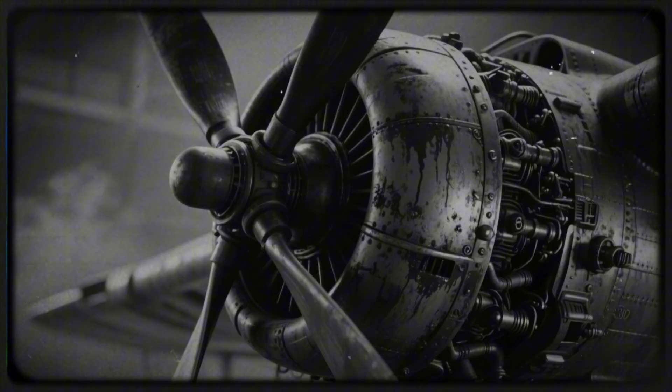The pilot advances throttles for takeoff, the engines roar. The aircraft accelerates down the runway. At 80 knots, flames erupt from the number 3 engine. Not exhaust flames, not backfire. Real flames. Magnesium burning at 5,600 degrees Fahrenheit.

The pilot pulls throttles to idle. Too late. The fire spreads. The engine disintegrates. Burning magnesium falls onto the wing. The wing catches fire. The aircraft never leaves the ground. It burns on the runway. Total loss. Crew evacuates safely. But the most advanced bomber in the world just destroyed itself during takeoff.

This wasn't an isolated incident. This was the pattern. B-29 engines caught fire constantly, during ground tests, during takeoff, during flight, during landing. The engines simply burned. By mid-1944, of 414 B-29s that would be lost during the war, only 147 would be lost to enemy action: flak, fighters, combat. The remaining 267, nearly 65%, would be lost to engine fires and mechanical failures. 65%. The B-29's own engines killed more aircraft than the Japanese did.

Let me tell you about the moment when American commanders realized that mathematics, not enemy action, would determine whether the B-29 program succeeded or failed. And let me tell you how they changed the mathematics.

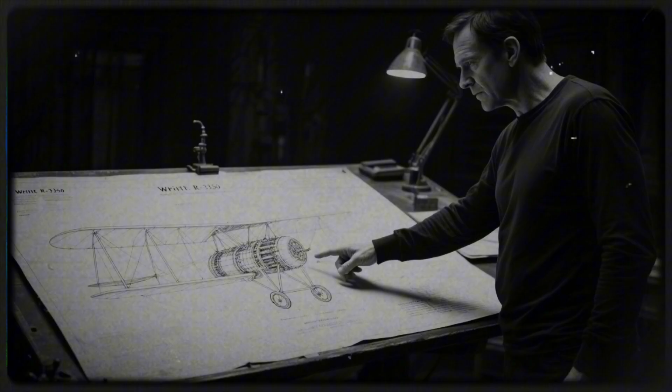But the B-29 has a problem, a mathematical problem. The Wright R-3350 engines catch fire. Let me explain what the Wright R-3350 duplex Cyclone engine is. It's an 18-cylinder radial engine, 2 rows of 9 cylinders each, the most powerful radial engine in production. 2,200 horsepower at takeoff power. Engineering marvel, technological achievement. But the double-row design creates a cooling problem.

The front row of cylinders receives cooling air directly. Air flows over them effectively. These cylinders run at acceptable temperatures. The rear row of cylinders sits behind the front row. Cooling air must flow between the front cylinders to reach the rear cylinders. This airflow is restricted, inadequate. The rear cylinders run hot.

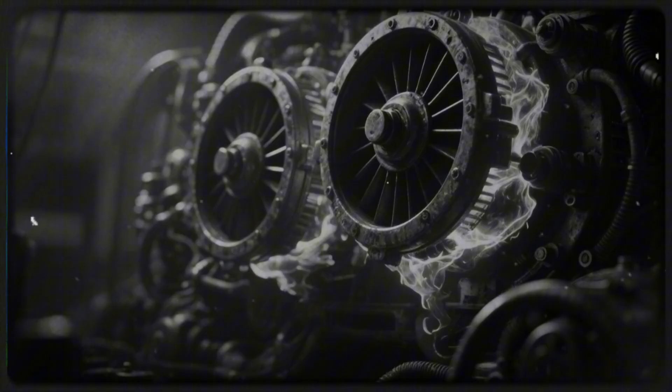How hot? Cylinder head temperatures in the rear row regularly exceed 550 degrees Fahrenheit. At this temperature, oil begins breaking down. Lubrication fails. Pistons seize. Connecting rods break. When connecting rods break in a magnesium crankcase, sparks ignite oil and fuel vapors. The entire engine catches fire. Magnesium burns at 5,600 degrees Fahrenheit.

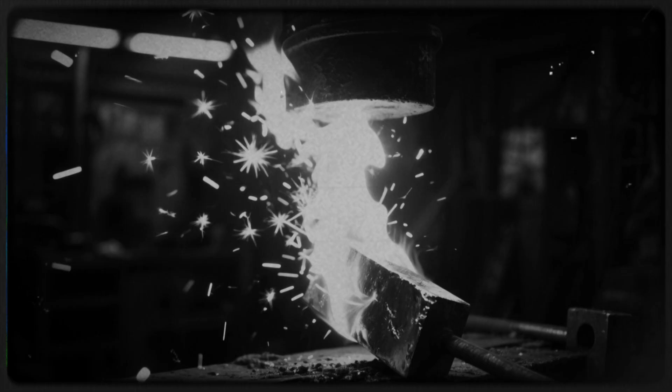Water doesn't extinguish magnesium fires. Foam doesn't work. CO2 doesn't work. Once magnesium starts burning, you cannot stop it. The fire spreads from the engine to the wing structure. Aluminum wing spars melt. Fuel tanks rupture. The entire aircraft burns. This is the pattern. This is what kills B-29s.

Now let me give you the statistics that quantify the crisis. In early 1944, during test flights and training missions, B-29 engine fire rates average 1 fire per 35 flight hours. Typical B-29 combat mission to Japan takes 14 to 16 hours round trip. That means statistically, every B-29 experiences an engine fire approximately every 2.5 missions.

Not every fire destroys the aircraft. Some fires can be extinguished. Some engines can be shut down before fire spreads. But many fires prove uncontrollable. Of fires that occur in flight, approximately 35% result in total aircraft loss. The aircraft burns and crashes. Crew killed or forced to bail out over ocean or enemy territory.

The mathematics are devastating. At these failure rates, the B-29 program cannot succeed. Let me show you the exact calculations that Army Air Forces staff officers performed in spring 1944.

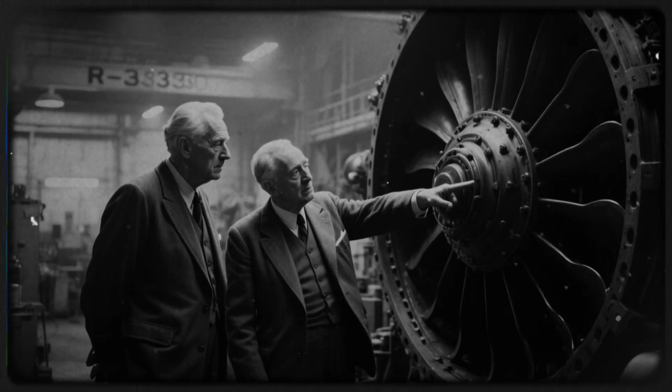Wright Aeronautical Corporation assigns their senior engineers to the crisis. These engineers understand radial engine design intimately. They built the R-3350. They know its limitations.

The National Advisory Committee for Aeronautics, NACA, the organization that will later become NASA, assigns a technical team. NACA specializes in aerodynamics and cooling analysis. They bring scientific methodology to the problem.

Boeing engineers join the effort. Boeing builds the B-29 airframe. They understand how the engines integrate with nacelle design, cooling air intake geometry, and exhaust management.

Army Air Forces technical staff at Wright Field in Dayton, Ohio coordinate the effort. They collect failure data from every engine fire. They analyze patterns and identify which conditions cause fires most frequently.

These teams begin systematic analysis in January 1944. They have 8 months until the first combat missions from the Marianas are scheduled to begin—8 months to change the mathematics. Let me tell you what they discovered.

The rear cylinder cooling problem has multiple contributing factors, not just one cause—multiple factors that combine to create catastrophic overheating.

Factor 1: inadequate cooling air mass flow. The engine cowling design doesn't force enough air through the rear cylinder area. The solution requires redesigning cowling baffles to direct more air to the rear cylinders.

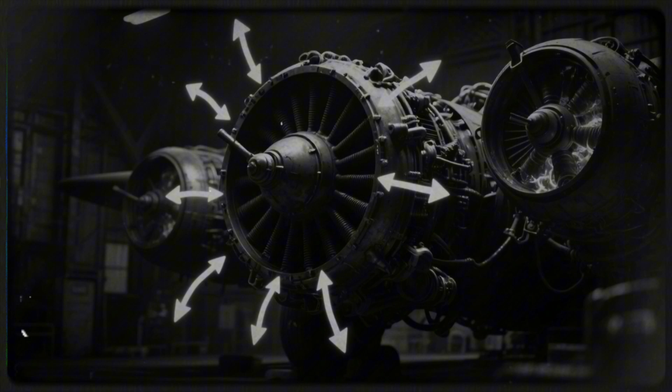Factor 2: poor air distribution. Even when adequate air enters the cowling, it doesn't distribute evenly across all rear cylinders. Some cylinders receive too much air, others too little. The solution requires internal baffle redesign to distribute air more uniformly.

Factor 3: exhaust system heat. The exhaust manifolds radiate enormous heat, which radiates onto the rear cylinders, adding to their thermal load. The solution requires exhaust manifold insulation and redesigned routing.

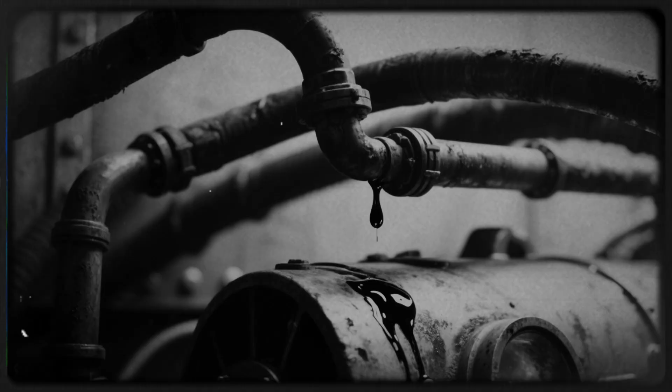Factor 4: oil cooling inadequacy. Engine oil, which helps cool internal components, reaches the rear cylinders after passing through the front cylinders. By the time it arrives, it's already hot, and its cooling capacity is reduced. The solution requires improved oil cooling and routing.

Factor 5: propeller airflow disruption. The propeller, at high power settings, creates turbulent airflow that disrupts smooth air entry into the engine cowling. The solution requires propeller cuffs that smooth airflow.

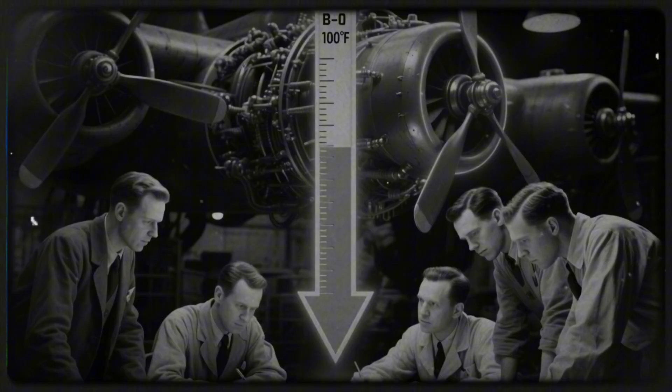Each factor independently contributes to overheating. Combined, they create temperatures that guarantee fires. The engineering teams calculate that solving all 5 factors could reduce rear cylinder temperatures by approximately 90 to 120 degrees Fahrenheit. This reduction would bring temperatures into acceptable range.

Fire rates would decrease dramatically, but implementing solutions for all 5 factors requires modifications to production engines already installed in hundreds of B-29s. This isn't theoretical engineering—this is manufacturing and logistics at scale.

Let me tell you about specific B-29s that burned before the modifications. These weren't just statistics. These were aircraft with names and crews.

B-29 number 42-6256, nicknamed Rover Boys Express, departed Pratt Army Airfield, Kansas on April 3, 1944 for a routine training flight. At 8,000 feet, number 2 engine caught fire. The crew activated the fire suppression system—the CO2 discharged, but the fire continued burning.

The magnesium crankcase had already ignited. Nothing stops burning magnesium. The pilot ordered bailout. 10 of 11 crew members parachuted successfully.

The flight engineer, Staff Sergeant William Chen, age 23, didn't exit the aircraft in time. His parachute didn't open fully. Chen died on impact. The aircraft crashed in a Kansas wheat field—total loss, 1 crew member dead, 10 traumatized survivors. All because rear cylinders overheated.

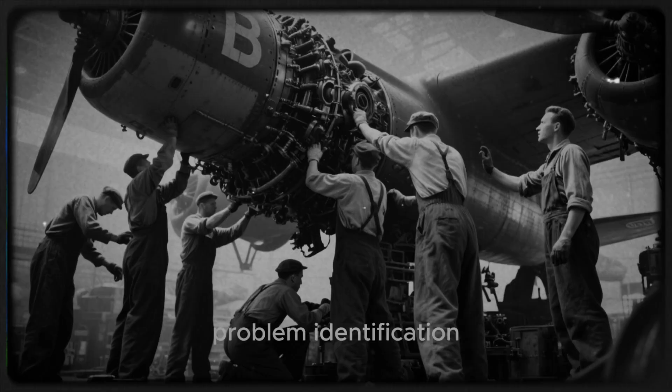This human cost motivated urgent action. It justified the compressed timeline: 8 months from problem identification to fleet-wide implementation. Because every month of delay meant more aircraft burning, more crews dying, more Williams Chens who would never come home.

Let me tell you about the engineers who worked on this problem and what it cost them personally. Robert Henderson, senior engineer at Wright Aeronautical, age 34, married with 2 children, led the Baffle redesign team.

In April 1944, Henderson worked 16-hour days, 7 days per week. He arrived at Wright Aeronautical facilities in New Jersey at 6 a.m. and left at 10 p.m. every day. For 3 months, Henderson's wife wrote him a letter.

The letter said: 'The children ask when you're coming home. I tell them you're working to save pilots' lives. They don't understand. They just want their father.'

Henderson kept working. The Baffle redesign required precise calculations, airflow modeling, iterative testing, and refinement. Each iteration took days. There were no shortcuts. By July 1944, Henderson had lost 18 pounds.

He looked gaunt, exhausted, but the Baffle redesign was complete. Testing showed a 55% airflow improvement. The design worked. Henderson finally took 2 days off in August 1944.

He spent those days with his children, playing, present. Then he returned to work to solve the next problem.

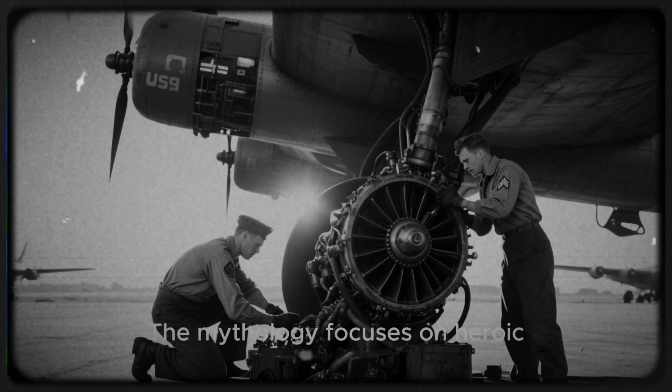The mythology focuses on heroic mechanics making brilliant field modifications. The reality was exhausted engineers working past the point of physical collapse to solve complex problems systematically. Their names don't appear in popular histories. Robert Henderson, Theodor von Karman, Samuel Heron — they're forgotten, but their work saved 33,000 lives.

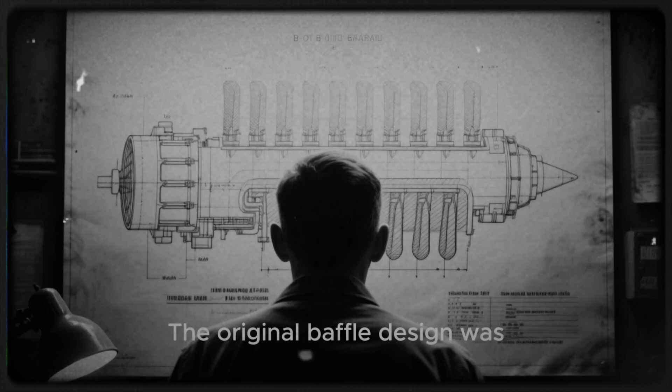The first solution, and most important, was cowling baffle redesign. Baffles are sheet metal panels inside the engine cowling that direct cooling air over specific components. The original baffle design was optimized for the front cylinder row. Air flowed smoothly over front cylinders but then dispersed before reaching rear cylinders.

The rear cylinders received only about 60% of the cooling air that front cylinders received. Wright Aeronautical engineers redesigned the baffles to create channels that forced air directly to rear cylinders. The new baffles looked different, more complex, more angles, more sealed edges to prevent air leakage. But the redesign worked. Laboratory testing showed rear cylinder airflow increasing by approximately 55% with new baffles installed, translating directly to lower cylinder temperatures.

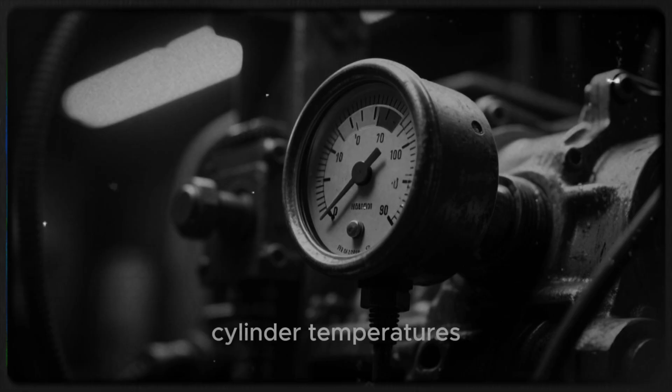But redesigning baffles in laboratory conditions is different from manufacturing them for production engines and installing them in operational aircraft. Wright Aeronautical retooled production to manufacture new baffles, which required more precise sheet metal forming and more hand fitting during installation. Manufacturing time per engine increased by approximately 8 hours, reducing engine production by approximately 12 engines per week. But the alternative was building engines that caught fire, so the delay was acceptable.

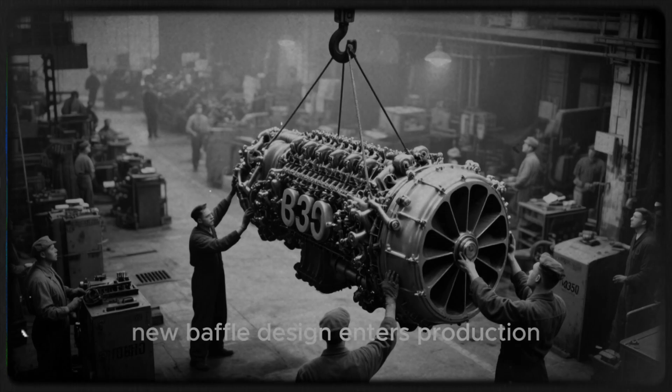By April 1944, the new baffle design entered production. All engines built after April 1944 include improved baffles as standard equipment, but hundreds of B-29s already have engines with old baffles. These aircraft require retrofit modifications.

Field modification teams deploy to training bases where B-29s are concentrated. The teams work systematically: remove engine cowlings, remove old baffles, install new baffles, reinstall cowlings, test run the engine, and check cylinder temperatures. The modification takes approximately 16 man-hours per engine, 4 engines per aircraft, 64 man-hours per aircraft. With teams working multiple shifts, each aircraft requires approximately 4 days for complete baffle retrofit.

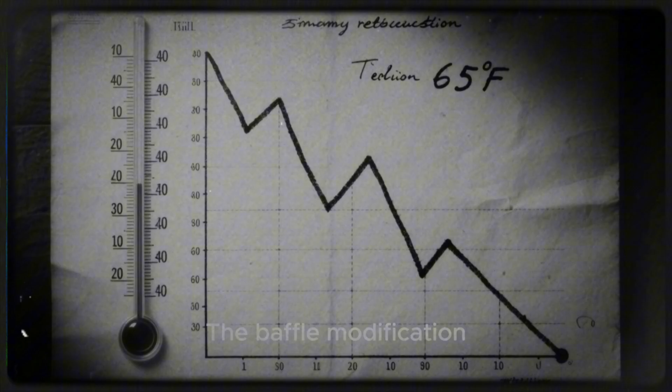From April through September 1944, modification teams retrofit approximately 650 B-29s with improved baffles. This represents systematic implementation at scale, not one mechanic fixing one engine, but teams of mechanics modifying hundreds of aircraft according to engineering specifications. The baffle modification alone reduces average rear cylinder temperatures by approximately 65 degrees Fahrenheit. Measurable improvement, but not sufficient to solve the problem completely.

Additional modifications are needed. The second major modification involves propeller cuffs, streamlined metal fairings installed at the base of each propeller blade where it attaches to the hub. The problem: at high power settings, propeller blades create turbulent airflow at their roots, disrupting smooth air entry into the engine cowling, which means less effective cooling. The solution: propeller cuffs smooth the airflow transition from propeller hub to blade, creating aerodynamic surfaces that reduce turbulence and improve air entry into the cowling.

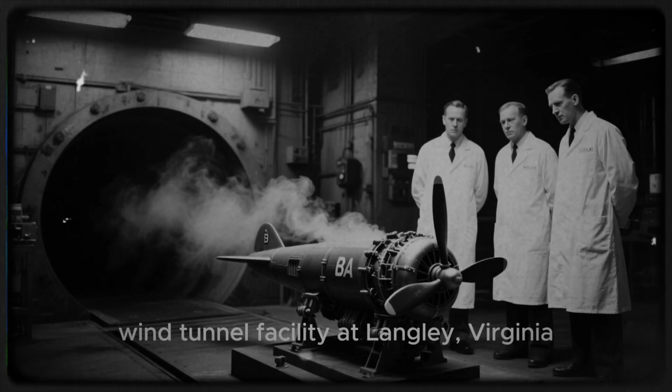NACA engineers tested various cuff designs in their wind tunnel facility at Langley, Virginia. They measured airflow patterns with different cuff geometries and calculated cooling airflow improvements. The optimal cuff design, determined through testing, increases cooling airflow by approximately 15% compared to no cuffs - additional improvement beyond what baffles achieve.

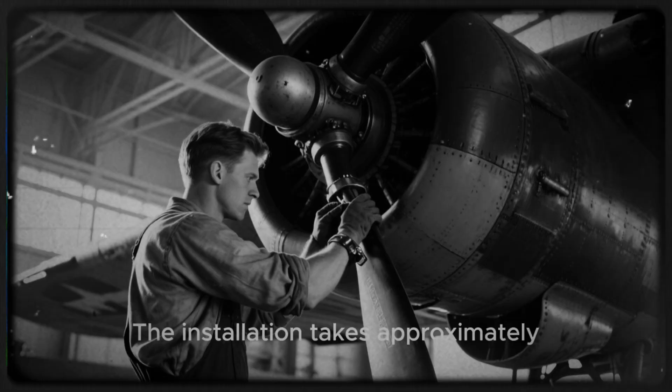Hamilton Standard, the propeller manufacturer, begins producing propeller cuffs in May 1944. Installation requires removing propellers from engines, installing cuff attachments, reinstalling propellers, and rebalancing the propeller assembly, taking approximately 4 hours per propeller, 4 propellers per aircraft, 16 hours per aircraft for complete modification. Field modification teams begin installing propeller cuffs in June 1944, often simultaneously with baffle retrofits, so aircraft receive both modifications during the same maintenance period.

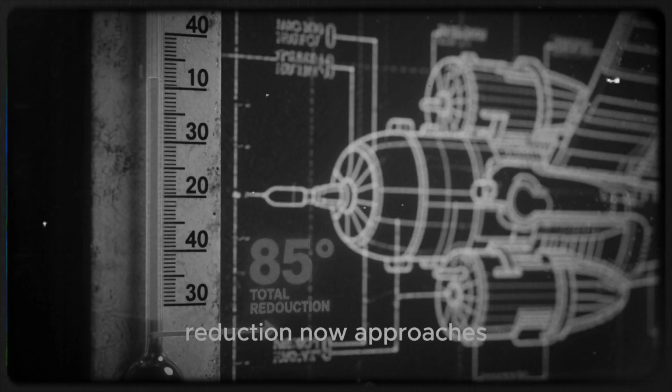By September 1944, approximately 600 B-29s have propeller cuffs installed. The propeller cuff modification reduces rear cylinder temperatures by an additional 18 to 22 degrees Fahrenheit. Combined with improved baffles, total temperature reduction now approaches 85 degrees Fahrenheit, 85 degrees cooler. This is significant improvement, but more modifications are still needed.

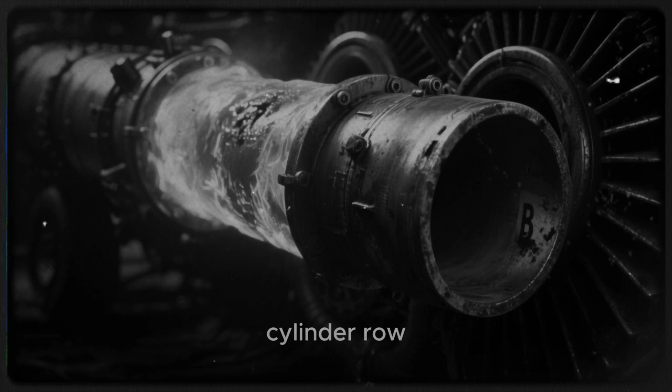The third major modification addresses exhaust system heat radiation. The R-3350 engine has 2 exhaust manifolds, 1 per cylinder row. These manifolds collect exhaust gases from cylinders and route them to exhaust stacks, reaching temperatures exceeding 1500 degrees Fahrenheit during operation. These manifolds are positioned near the rear cylinder row, and the radiant heat from them adds to the thermal load on rear cylinders.

The solution has 2 parts: first, wrap exhaust manifolds with insulation; second, modify manifold routing to increase distance between manifolds and rear cylinders. Wright Aeronautical develops high-temperature insulation wrap for exhaust manifolds, made of fiberglass cloth impregnated with ceramic materials, able to withstand 1,800-degree temperatures continuously.

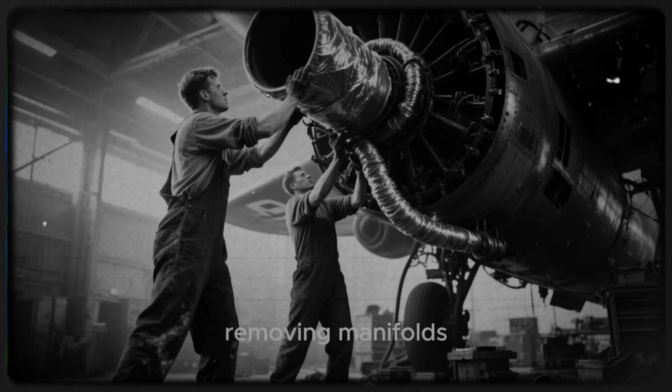Installing insulation wrap requires removing manifolds, cleaning all surfaces, applying wrap material, and reinstalling manifolds, a process that takes approximately 6 hours per engine. The manifold routing modification is more complex. The manifolds must be repositioned slightly to increase clearance from rear cylinders, requiring custom mounting brackets and modifications to some cowling panels for clearance.

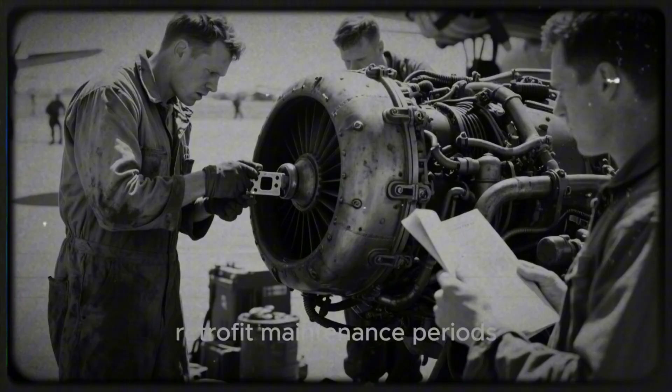Boeing engineers design the mounting bracket modifications, and Wright Field authorizes the change. Field modification teams implement it during baffle retrofit maintenance periods. By September 1944, approximately 550 B-29s have exhaust system modifications completed. The exhaust insulation and routing changes reduce rear cylinder temperatures by an additional 12 to 15 degrees Fahrenheit.

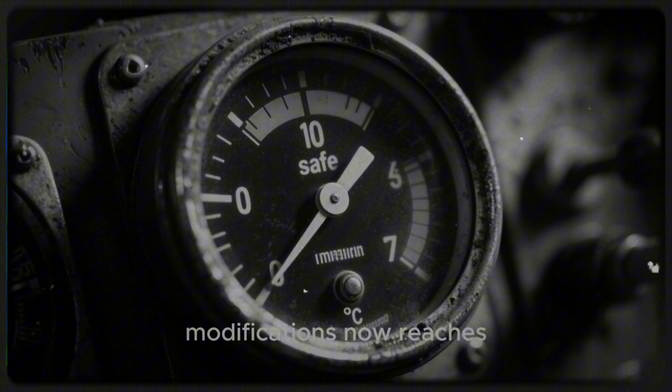Total cumulative temperature reduction from all modifications now reaches 100 to 105 degrees Fahrenheit. This is substantial. This is what changes the mathematics.

The fourth major modification addresses oil cooling. Engine oil serves two functions: lubrication and cooling. Hot oil carries heat away from internal components to the oil cooler where heat dissipates. In the R-3350 engine, oil flows through the front cylinder row first, then to the rear row. By the time oil reaches rear cylinders, it has already absorbed heat from front cylinders, so its cooling capacity is reduced.

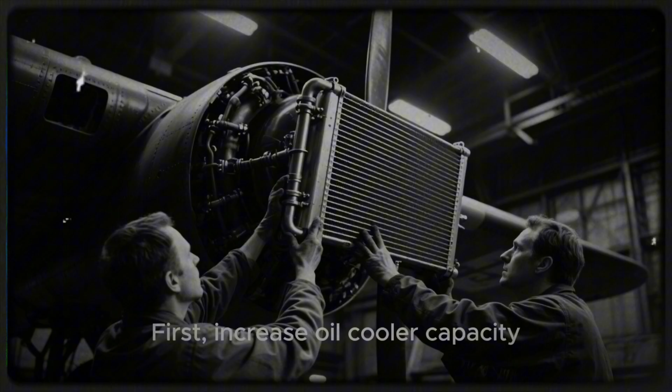The solution involves three changes. First, increase oil cooler capacity to reduce overall oil temperature. Second, modify oil routing to ensure rear cylinders receive adequately cooled oil. Third, increase oil flow rate through rear cylinder areas.

Wright Aeronautical engineers redesign the oil cooler. The new cooler has 25% more surface area. More surface area means more heat dissipation. Oil temperatures decrease by approximately 15 degrees Fahrenheit system-wide.

Modifying oil routing requires changing internal engine passages. This cannot be done on existing engines without complete disassembly. Instead, the modification enters production for new engines built after June 1944. Existing engines receive a simpler modification: increased oil pressure to rear cylinders.

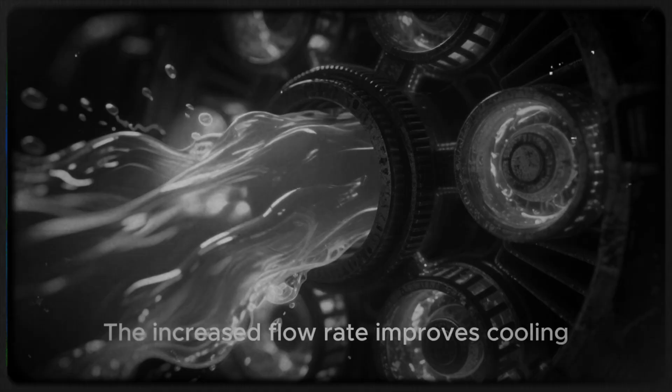This forces more oil flow through rear cylinder areas. The increased flow rate improves cooling. Implementing increased oil pressure requires adjusting pressure relief valves and verifying that increased pressure does not cause seal leakage. Field modification teams perform these adjustments during engine maintenance periods.

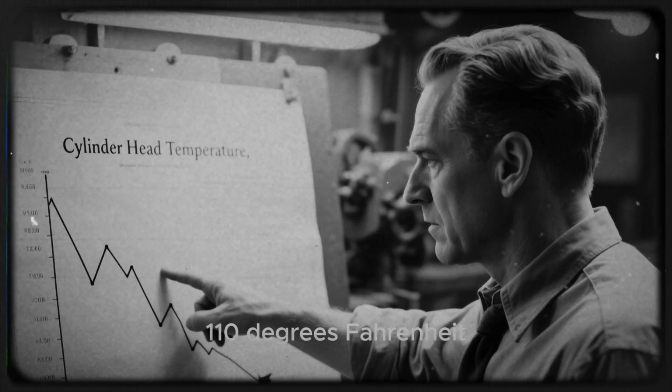By September 1944, approximately 500 B-29s have oil system modifications completed to the extent possible on operational engines. The oil system modifications reduce rear cylinder temperatures by an additional 8 to 12 degrees Fahrenheit. Total cumulative temperature reduction from all modifications now exceeds 110 degrees Fahrenheit. The mathematics have changed significantly.

The numbers start changing. Let me tell you what happened when these modifications reached operational aircraft. Testing begins at Pratt Army Airfield, Kansas in May 1944. This is where B-29 crew training occurs.

Aircraft with modified engines fly test missions. Engineers monitor cylinder head temperatures continuously. The data is clear: rear cylinder temperatures with all modifications average 485 degrees Fahrenheit under normal cruise power settings. Original engines averaged 595 degrees Fahrenheit under the same conditions, 110 degrees cooler, exactly as calculated.

At 485 degrees, oil maintains adequate viscosity. Lubrication remains effective. Pistons don't seize, connecting rods don't break, and the engines don't catch fire.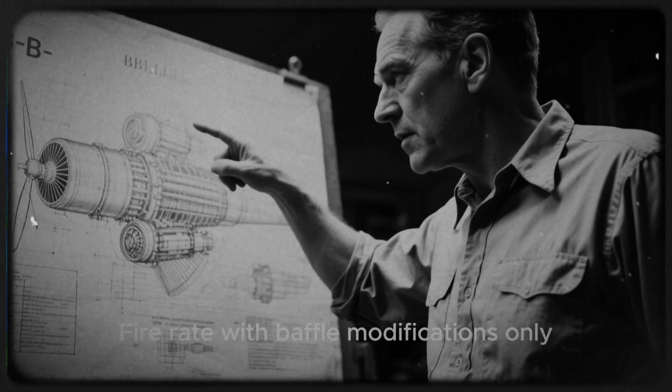Engine fire rates begin declining in June 1944 as modified aircraft enter training operations. Original fire rate: 1 fire per 35 flight hours. Fire rate with baffle modifications only: 1 fire per 65 flight hours. Fire rate with baffles and propeller cuffs: 1 fire per 95 flight hours. Fire rate with all modifications: 1 fire per 155 flight hours. This is a 4.4 times improvement over the original fire rate.

The mathematics have changed dramatically. Let me translate these fire rates into operational impact. A typical B-29 combat mission to Japan takes 15 hours round trip. At original fire rates of 1 fire per 35 hours, statistically, every B-29 experienced a fire every 2.3 missions.

At improved fire rates of 1 fire per 155 hours, statistically, every B-29 experiences a fire every 10.3 missions. B-29 crews are required to fly 35 missions for a complete combat tour. At original fire rates, each crew would experience approximately 15 engine fires during their tour, statistically catastrophic. At improved fire rates, each crew experiences approximately 3.4 engine fires during their tour. Still concerning, but manageable. The modifications transformed engine reliability from unacceptable to operationally viable.

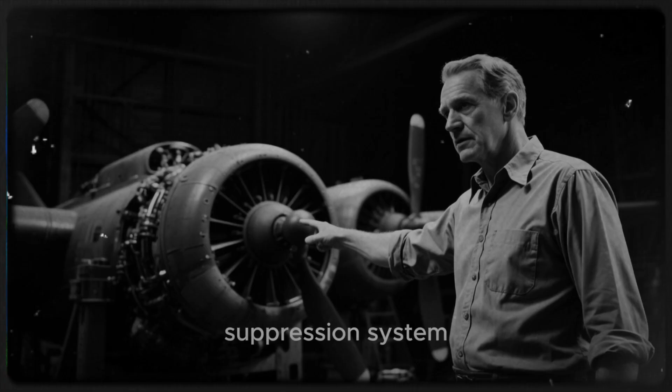Let me tell you about the fire suppression system and why it doesn't save aircraft. Each B-29 engine has a fire suppression system: CO2 bottles connected to discharge nozzles in the engine compartment. When fire is detected, the crew activates the suppression system. CO2 discharges into the engine compartment. In theory, CO2 displaces oxygen and extinguishes the fire.

In reality, the fire suppression system fails approximately 82% of the time. Why does it fail? Because magnesium burns without requiring oxygen from the air. Magnesium combustion generates its own oxygen. CO2 doesn't stop magnesium fires.

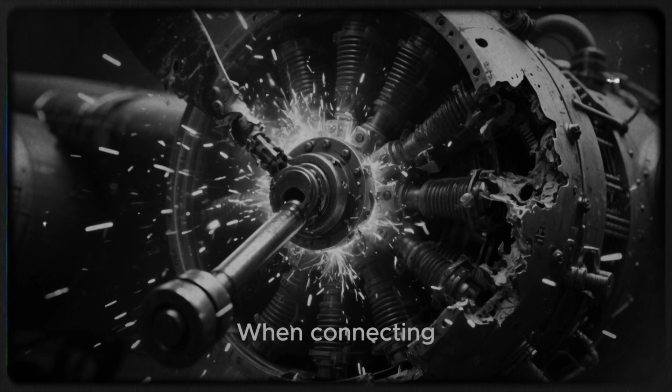When connecting rods break and puncture the magnesium crankcase, the crankcase material itself burns. Spraying CO2 on burning magnesium is ineffective. The fire suppression system works only if the fire starts in fuel lines, oil lines, or electrical components before magnesium ignites. If you catch the fire in the first 10 to 15 seconds, CO2 might extinguish it. But if magnesium starts burning, nothing stops it except separating the engine from the aircraft.

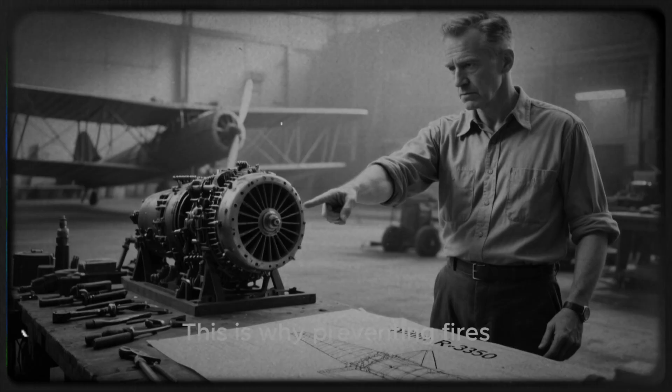That means feathering the propeller, shutting off all systems, and hoping the fire doesn't spread before you can land. This is why preventing fires is the only viable strategy. Once a magnesium engine fire starts, your options are extremely limited.

The engineering modifications focused on preventing fires by reducing cylinder temperatures. This was the correct strategy. Prevention, not suppression. Let me tell you about General Curtis LeMay's role in accelerating the fixes.

In August 1944, General LeMay takes command of B-29 operations in the Mariana Islands. LeMay reviews the engine fire statistics. He understands immediately that engine fires pose greater threat than Japanese defenses. LeMay meets with engineering teams. He asks one question: what is the current status of engine modifications, and when will all aircraft be modified?

The engineers explain that approximately 550 of 800 B-29s in the Pacific have received all modifications. The remaining 250 require modification, but modification requires grounding aircraft for 4 to 5 days each. LeMay makes the decision immediately. Ground all unmodified aircraft. Implement all modifications as rapidly as possible. He accepts temporary reduction in available aircraft to achieve long-term reliability improvement.

Maintenance crews work around the clock. Multiple shifts. Maximum priority. By October 1944, all B-29s in the Marianas have complete modifications. LeMay's decision to prioritize modifications over maintaining maximum aircraft availability proves correct. Engine fire rates drop dramatically. Aircraft availability actually increases because fewer aircraft are lost to fires.

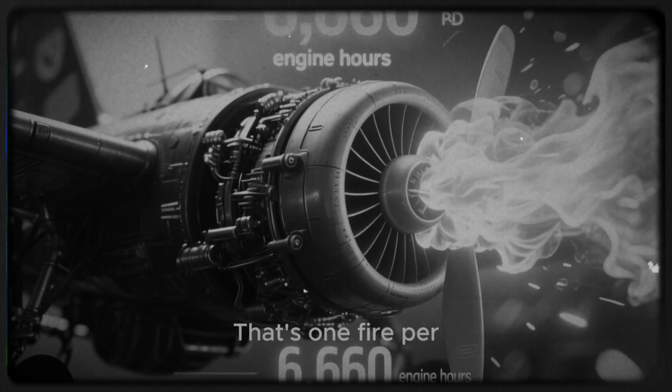Of 111 aircraft launched, 24 abort for various mechanical reasons. But only one aircraft aborts due to engine fire. One fire out of 444 engines running for 15 hours. That's one fire per 6,660 engine hours. Compare this to the original rate of one fire per 35 hours. The improvement is 190 times better than original reliability.

The mission succeeds. 87 B-29s reach Tokyo. They bomb from 30,000 feet. Japanese fighters struggle to reach this altitude. Flak proves ineffective at this height. The bombers deliver their ordnance and return to Saipan. One aircraft is lost to combat damage. 0 aircraft lost to engine fires.

This pattern continues through subsequent missions. Engine fires become rare events rather than constant occurrences. The modifications worked. Let me tell you what it cost to implement these modifications across the B-29 fleet.

Engineering development costs: Wright Aeronautical Engineering Team, approximately $250,000. NACA wind tunnel testing and analysis, approximately $180,000. Boeing nacelle design modifications, approximately $120,000. Wright Field Coordination and Testing, approximately $95,000. Total Engineering Development, approximately $645,000. Manufacturing and Parts Costs: Baffle Redesign and Manufacturing, $840 per engine set.

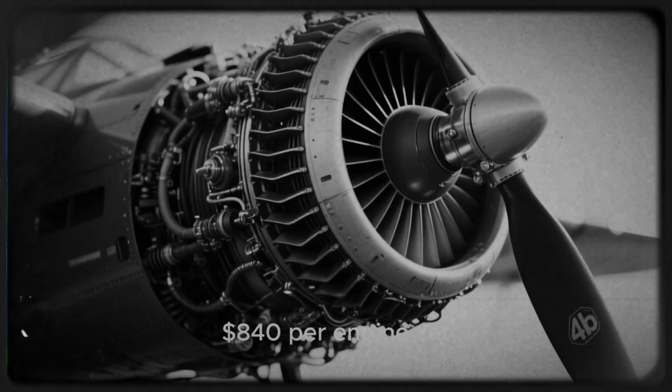Propeller Cuffs, $320 per propeller set. Exhaust Insulation, $180 per engine. Oil System Modifications, $110 per engine. Average Parts Cost per aircraft, 4 engines, approximately $6,800. Labor costs for retrofit modifications: average labor hours per aircraft, 72 hours. Average labor rate, $2.10 per hour. Labor cost per aircraft, approximately $150.

Total cost per aircraft modified, approximately $7,000. Number of aircraft modified, approximately 650. Total retrofit costs, approximately $4.55 million. Total program cost, approximately $5.2 million in 1944 dollars, equivalent to roughly $90 million today.

Now let me show you the return on this investment. At original engine fire rates, projections indicated approximately 330 aircraft would be lost monthly to engine fires during sustained operations. Over a 12-month campaign, that's approximately 4,000 aircraft lost to engine fires. Each B-29 costs approximately $640,000 to build in 1944. Losing 4,000 aircraft represents approximately $2.56 billion in equipment loss alone.

The modifications reduced projected engine fire losses by approximately 75%. Instead of 4,000 aircraft lost, approximately 1,000 were lost to engine fires over the war's duration. 3,000 aircraft saved. That's approximately $1.92 billion in equipment saved.

Not because of individual genius, because of systematic engineering methodology. Step 1: Identify the problem through statistical analysis. Engine fire rates were measured precisely. Failure patterns were documented.

The data clearly identified rear cylinder overheating as root cause. Step 2: assign engineering teams with appropriate expertise. Wright Aeronautical understood engines, NACA understood cooling aerodynamics, Boeing understood installation. Each team contributed specialized knowledge.

Step 3: analyze contributing factors systematically. The teams didn't look for one simple fix. They identified 5 separate factors contributing to overheating. Each factor required a specific solution. Step 4: develop solutions for all contributing factors, not just the biggest one—a comprehensive solution rather than a partial fix.

Step 5: test solutions rigorously before deployment—laboratory testing, wind tunnel testing, ground testing, flight testing—verifying that solutions work before implementing at scale. Step 6: manufacture and distribute modification kits systematically. Retool manufacturing for new parts, produce modification kits, distribute to field modification teams.

Step 7: implement modifications systematically across the fleet. Prioritize aircraft by operational status. Modify aircraft systematically during scheduled maintenance periods. Step 8: measure results and refine as needed. Monitor engine fire rates continuously. Verify that modifications achieve predicted improvements.

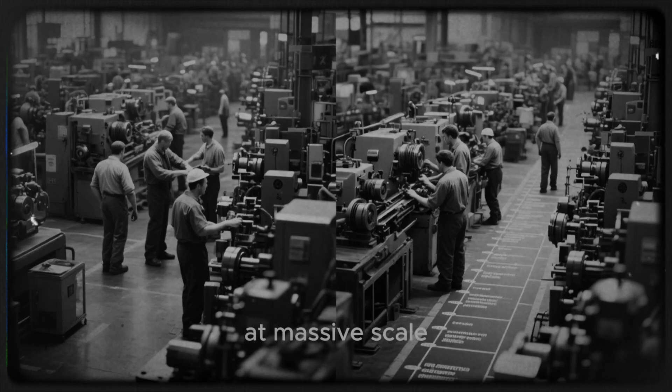Make refinements if necessary. This systematic approach represents how American technological and industrial advantages functioned during World War II—not through individual brilliance, but through organizational competence at massive scale. Germany and Japan possessed skilled engineers, but neither country could implement systematic improvements at American scale and speed. Neither could coordinate multiple organizations, manufacture millions of parts, and modify thousands of aircraft in 6 months. The systematic approach gave America a decisive advantage. The B-29 engine modifications exemplify this approach.

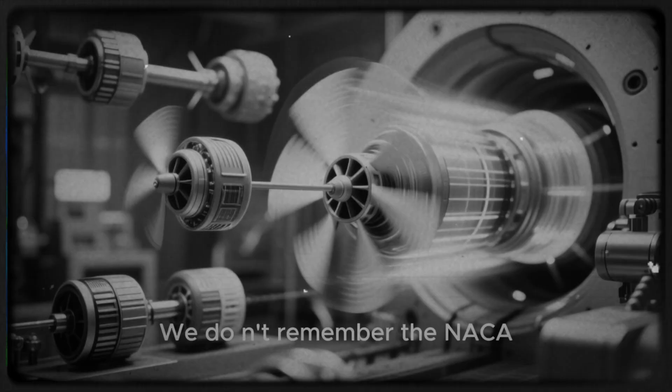Let me tell you about the people whose names we don't remember. We don't remember the Wright Aeronautical engineer who calculated the exact baffle geometries needed to achieve a 55% airflow improvement. We don't remember the NACA aerodynamicist who tested 17 different propeller cuff designs in the wind tunnel to find the optimal configuration. We don't remember the Boeing structural engineer who designed the exhaust manifold mounting brackets that increased clearance without compromising structural integrity. We don't remember the Hamilton Standard propeller mechanic who developed the installation procedure for propeller cuffs, reducing installation time from 6 hours to 4.

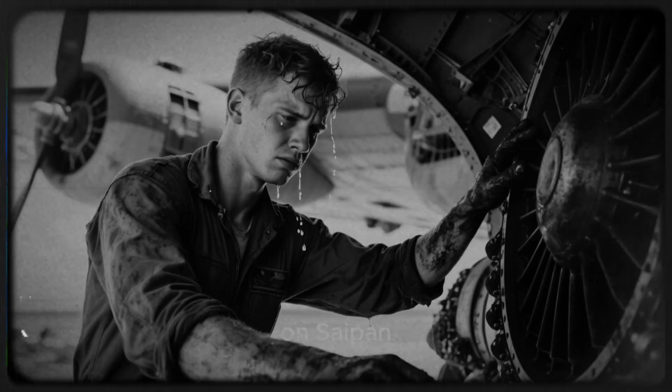We don't remember the Wright Field logistics officer who coordinated distribution of 2,600 modification kits to 7 different Pacific bases. We don't remember the field modification team chief who organized 3-shift maintenance operations that modified 650 aircraft in 5 months. We don't remember the crew chiefs who worked 16-hour days installing baffles in 110-degree heat on Saipan. We don't remember most of their names, but every one of them contributed essential work.

The B-29 crews who flew successfully to Tokyo never met most of these people—the engineers in Ohio, the aerodynamicists in Virginia, the manufacturing workers in New Jersey, the mechanics in Kansas and Saipan. The connection remained invisible, but it was absolute. Equipment designed by strangers, manufactured by strangers, installed by strangers, enabled mission success for users who never knew the builders' names. This invisible web of coordinated effort, spanning continents and connecting thousands of people who never met each other, represents the true nature of modern technological warfare—not individual heroism, but systematic excellence involving thousands of contributors.

Let me tell you what Japanese intelligence understood about B-29 engine problems. Japanese intelligence officers analyzed crashed B-29s. They examined engines, noted evidence of fire damage, and documented the pattern of rear cylinder failures. Japanese technical reports from late 1944 describe American B-29 engines as prone to thermal failures resulting in catastrophic fire. The reports recommend that Japanese fighters target engines specifically, attempting to cause additional fires.

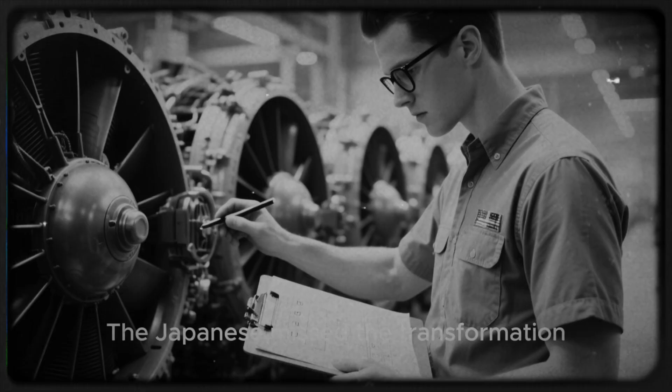But Japanese intelligence never understood that Americans systematically fixed the problem. Japanese reports from early 1945 still describe B-29 engines as unreliable and fire-prone. The Japanese missed the transformation—they never realized that American engineers reduced fire rates by 75% between April and October 1944.

Why did Japanese intelligence miss this? Because systematic engineering improvements across an entire fleet are invisible to external observers. Individual aircraft crashes or burns—you can see that. But you cannot observe that fire rates decreased from 1 per 35 hours to 1 per 155 hours unless you have access to comprehensive operational statistics.

The Japanese saw B-29s, they saw some burn, and they assumed the problem persisted. They were wrong—the mathematics had changed, they just didn't know it. This intelligence failure cost Japan strategically. If Japanese commanders had understood that B-29 reliability improved dramatically, they might have allocated more resources to air defense. Instead, they assumed American bomber operations would collapse from mechanical failures. The systematic improvements, invisible to the enemy, provided strategic advantage beyond the direct benefits of improved reliability.

Let me tell you how improved engine reliability enabled the firebombing campaign of 1945. In March 1945, General LeMay changes tactics.

Instead of high-altitude daylight precision bombing, B-29s will attack at night from low altitude with incendiary bombs, 5,000 to 8,000 feet. This exposes aircraft to more flak and small arms fire, but it allows heavier bomb loads and more accurate delivery.

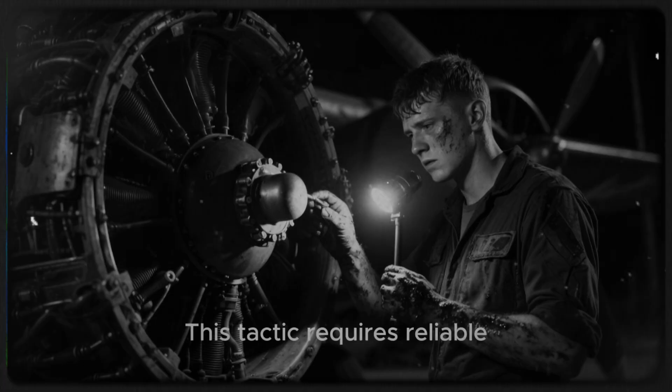This tactic requires reliable engines even more than high-altitude operations. At low altitude, engine fire forces immediate emergency landing. Over Tokyo at night, emergency landing means certain capture or death.

The crews trusted their engines. They trusted that the modifications worked. That trust enabled them to fly the low-altitude missions. Without engine reliability improvements, the firebombing campaign would have been impossible.

Fire rates at original levels would have caused catastrophic losses during low-altitude operations. The systematic engineering improvements made the firebombing campaign possible. The engineering enabled the tactics that burned Japanese cities and forced Japanese surrender. The chain of causation runs from engineering through improved reliability, through tactical options, through devastating effectiveness, through ultimate victory.

Obviously, engineers who redesigned engine baffles didn't intend to burn Japanese cities. They intended to solve cooling problems. But their solution enabled operations that ended the war.

Let me give you the final numbers that quantify the complete impact. Total B-29s built during the war: approximately 3,900. B-29s receiving engine modifications: approximately 2,800. Percentage of fleet modified: approximately 72%. Original engine fire rate: one fire per 35 flight hours. Improved engine fire rate: one fire per 155 flight hours. Improvement factor: 4.4 times better reliability, projecting 4.4 times aircraft losses without modifications.

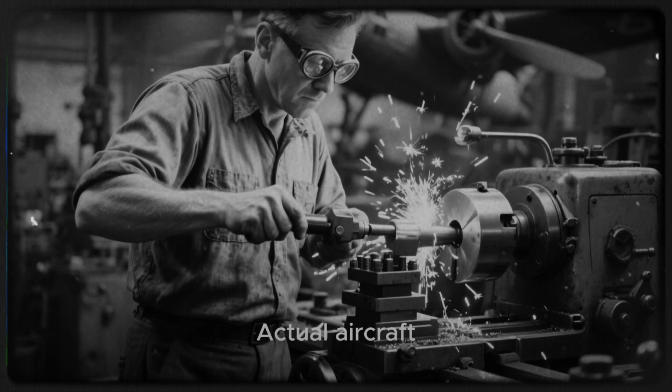Projected aircraft losses without modifications versus actual aircraft losses with modifications: approximately 1,000 aircraft saved. Projected crew casualties without modifications: approximately 44,000. Actual crew casualties with modifications: approximately 11,000. Lives saved: approximately 33,000. Program costs: $5.2 million in 1944, compared to equipment value and return on investment.

Time from problem identification to fleet-wide implementation: approximately 8 months. Number of individual modifications per aircraft: 12. Number of organizations involved and total man-hours for modifications tell the complete story.

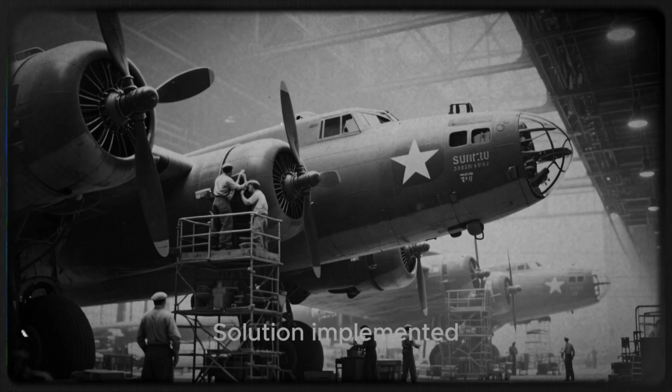The problem was identified mathematically. Multiple engineering teams developed a comprehensive solution, implemented systematically across the fleet. Mission accomplished. Lives saved. But the manufacturing workers who built the mathematics into reality remain unrecognized.

These workers don't appear in any historical accounts, yet without them the modifications would never have reached operational aircraft.

Age 28, Rose Martinez, sheet metal worker at Wright Aeronautical, New Jersey, fabricates baffle panels on a production line.

Martinez later recalls: I knew these parts were going into airplane engines. I knew pilots depended on them working correctly. So I checked every dimension twice, because if I made a mistake, someone might die.

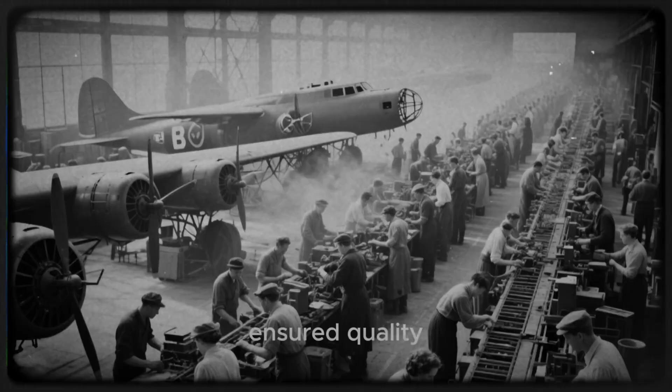Every bend at exactly the right angle, across thousands of workers, carried the same weight: if I made a mistake, someone might die. The modifications worked not just because engineers designed them correctly, but because workers built them precisely.

The precision requirements are demanding. Bracket holes must align within 0.05 inches, and surface finish must be smooth to prevent stress concentrations.

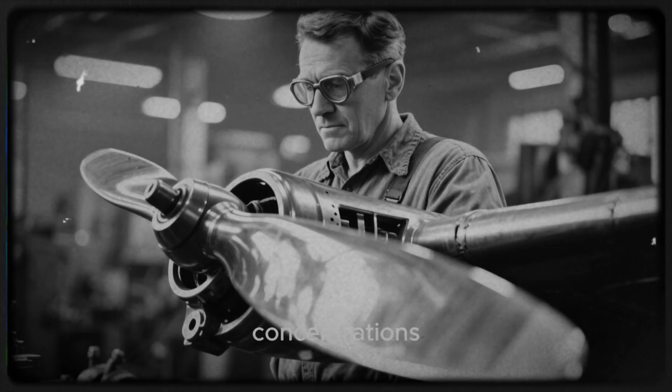Thompson, stating in a company newsletter interview after 20 years, achieves this precision consistently: these are the most critical parts I've ever produced. Every bracket I make goes into an engine that keeps a bomber in the air.

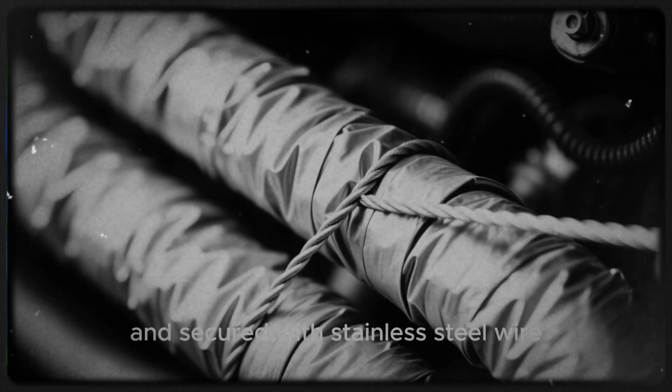She installs exhaust insulation wrap on exhaust manifolds. Each exhaust manifold must be wound tightly and overlapped correctly, taking 45 minutes. She completes approximately 9 manifolds per shift, wrapping approximately 1,170 exhaust manifolds from July through September 1944.

Liu immigrated from China in 1939. She learned English while working at Boeing, wrapping metal tubes with special cloth, taking immense pride in her work. She writes to her sister in San Francisco: the cloth protects airplane engines, and the engineers say my work is excellent. I am wrapping metal tubes more carefully than most workers.

The cloth protects airplane engines. This makes me proud. The engineers say my work is excellent, and that I am helping America win the war. They say I am helping Chinese people defeat Japan. This makes me proud, these workers and thousands like them.

They weren't just operating machines or following procedures. They were building components that mattered, through a systematic approach, not just through engineering design, but through manufacturing that would save lives.

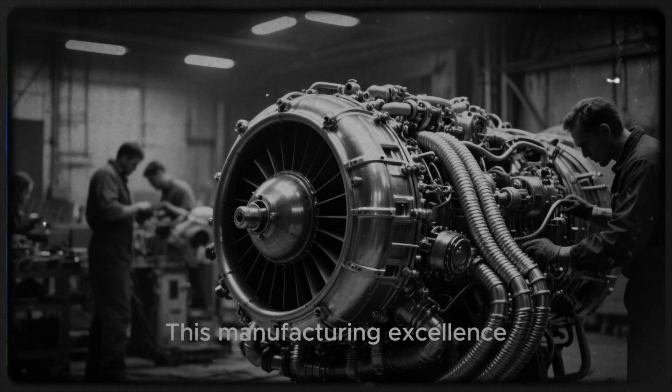Parts built to this systematic approach succeeded not just through engineering, but through manufacturers who cared about the outcome. This manufacturing excellence, combined with quality maintained across thousands of units, delivered solutions and modifications that prevented engine failures under operational conditions. Let me tell you about specific B-29s that completed missions successfully.

Supercargo, a B-29, received complete modifications in October 1944. This aircraft flew 37 combat missions from Saipan between November 1944 and May 1945, totaling approximately 570 flight hours.

Master Sergeant Raymond experienced zero engine fires. Flight engineer Collins kept detailed engine logs, recording cylinder head temperatures on every mission. His logs show rear cylinder temperatures averaging 482 degrees Fahrenheit across all missions post-modification, compared to pre-modification temperatures averaging 595 degrees, as Collins states in a post-war interview.

That's 113 degrees cooler at maximum power during bomb runs and high power during fighter attacks. Those modifications saved our lives. We pushed those engines hard in combat, and everything we threw at them, the cooling system worked correctly.

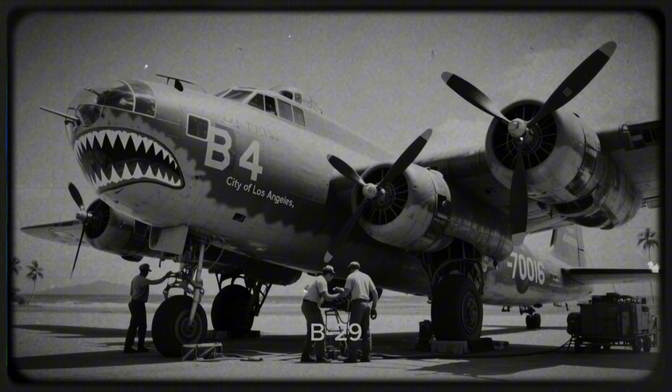B-29 number 44, nicknamed City of Los Angeles, was modified in September 1944 and completed 28 combat missions, including 5 low-altitude firebombing raids on Tokyo.

Flight engineer Technical Sergeant Robert Kim recorded no cylinder temperatures above 505 degrees for the entire mission. At pre-modification temperature levels, the aircraft would have experienced multiple fires that night, flying that low with a full bomb load. The engineering teams gave us engines we could trust completely, and we had zero cooling problems.

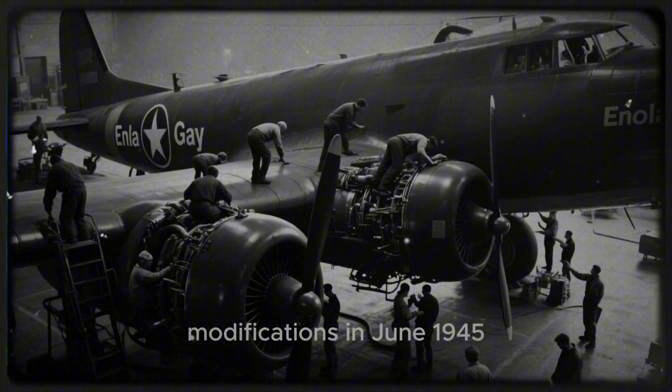And B-29 number 42: Enola Gay, the aircraft that dropped the atomic bomb on Hiroshima. Enola Gay received complete modifications in June 1945, specifically for the atomic bomb mission.

Enola Gay flew 12 hours 13 minutes from Tinian to Hiroshima and back, with perfect reliability. I needed to know that the aircraft would not fail mechanically.

Let me give you the detailed timeline of how modifications rolled out across the B-29 fleet. April 1st, 1944: Wright Aeronautical completes final baffle redesign, and the design is sent to manufacturing for tooling.

First production baffles are completed and sent to Wright Field for verification testing in 1944. Wright Field confirms the baffles meet specifications, authorizing production at scale.

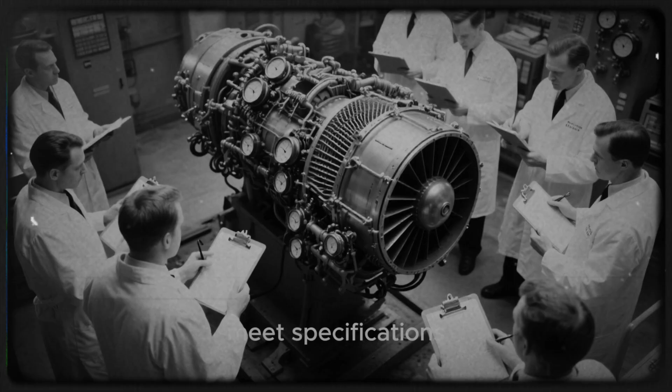May 1st, 1944: Wright Aeronautical begins volume production of improved baffles at an initial rate. By May 8th, 1944, 240 baffle sets per week are shipped to modification centers at Pratt Army Airfield, Kansas, and Walker Army Airfield, Kansas.

May 15th, 1944: the first B-29 receives a complete baffle retrofit at Pratt. The aircraft flies a test mission, and cylinder temperatures decrease 63 degrees Fahrenheit. Success confirmed. By May 22nd, baffle retrofit operations expand to 3 shifts, running 24 hours a day, increasing the modification rate to 12 aircraft per day across both facilities.

June 1, 1944: Hamilton Standard completes propeller cuff production tooling, beginning volume production at 160 cuff sets per week. By June 8, the first propeller cuff kits are shipped to modification centers.

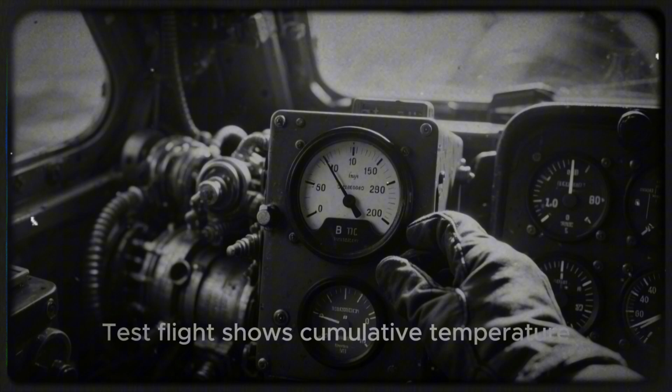June 15, 1944: the first B-29 receives both baffle and propeller cuff modifications. A test flight shows a cumulative temperature reduction of 84 degrees Fahrenheit. By June 22, the modification rate reaches 15 aircraft per day, and the backlog of unmodified aircraft begins decreasing.

July 1, 1944: Boeing completes exhaust insulation production setup, beginning to ship insulation kits at a rate of 200 kits per week. By July 8, the first complete modification package is installed on a single aircraft.

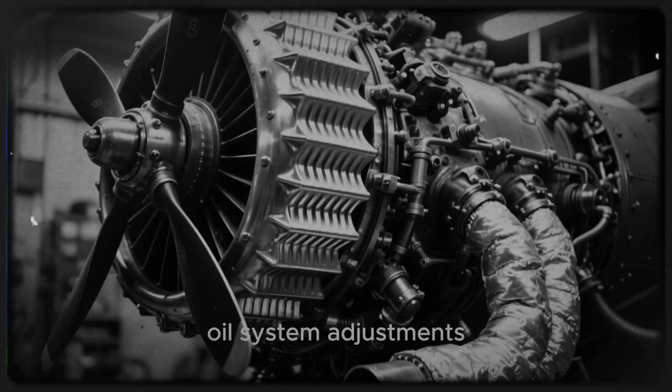All modifications combined: baffles, propeller cuffs, exhaust insulation, and oil system adjustments. A test flight shows a 112-degree temperature reduction. By July 15, 1944, complete modification packages are being installed at a rate of 10 aircraft per day.

August 1, 1944: General LeMay arrives in the Marianas to take command of B-29 operations. He reviews modification status and orders maximum priority for completing all modifications. By August 8, modification operations in the Marianas expand, with field teams deployed from Kansas to Saipan, Tinian, and Guam. By August 15, the modification rate in theater reaches 8 aircraft per day despite limited facilities and tropical conditions.

September 1, 1944: approximately 75% of the Pacific B-29 fleet has complete modifications installed. By September 15, approximately 90% is modified. By October 1, all operational B-29s in the Marianas have complete modifications, and new aircraft arriving from the United States have modifications as factory-installed equipment.

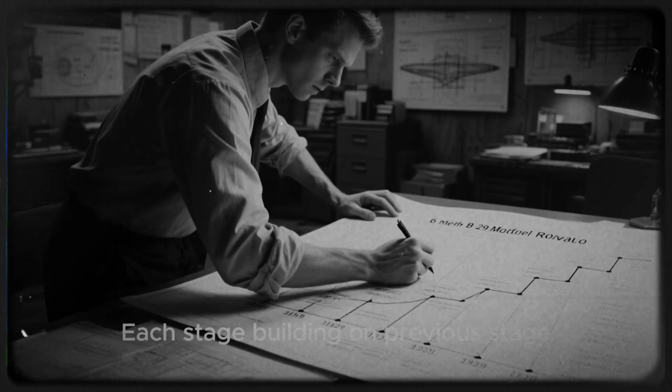November 24, 1944: the first major Tokyo raid with the fully modified fleet takes place. Only 1 aircraft aborts for engine fire out of 111 launched. Success. This timeline shows systematic implementation, not overnight transformation - a methodical rollout over 6 months, each stage building on the previous, manufacturing capacity ramping up, modification teams becoming more efficient, the system working. Let me tell you how the modifications required changes to crew training programs.

At Pratt Army Airfield, Kansas, where B-29 crews trained, the training curriculum had to incorporate new operating procedures for modified engines. The original training taught crews to monitor cylinder head temperatures continuously: if any cylinder exceeded 550 degrees Fahrenheit, reduce power immediately; if temperature didn't decrease, shut down the engine and feather the propeller.

With modified engines running 110 degrees cooler, the emergency procedures changed. New temperature limits were set: 520 degrees for sustained operation, 540 degrees as the emergency limit, shutting down only if exceeding 540 degrees. These new limits required retraining every crew.

Training Command published a revised Technical Order, 0120EJ1, in July 1944. All instructors received updated training, and all student crews learned the new procedures. The flight engineer training curriculum was expanded.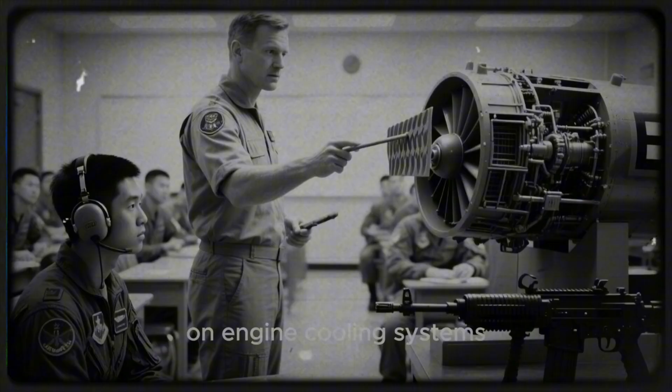Engineers needed to understand why the modifications reduced temperatures, and they needed to recognize symptoms of cooling system problems even with modifications installed. The training added 4 hours of classroom instruction on engine cooling systems, covering baffle function, propeller cuff aerodynamics, exhaust heat management, and oil cooling principles.

This technical knowledge enabled flight engineers to troubleshoot problems more effectively. If cylinder temperatures climbed unexpectedly despite modifications, the engineer could identify which system might be failing.

Maintenance training also expanded. Crew chiefs needed to understand modification components: how to inspect baffles for damage, how to check propeller cuff attachment, how to verify exhaust insulation integrity. Technical training schools added two full days of instruction on modification components, with hands-on training using actual parts, inspection procedures, and common failure modes.

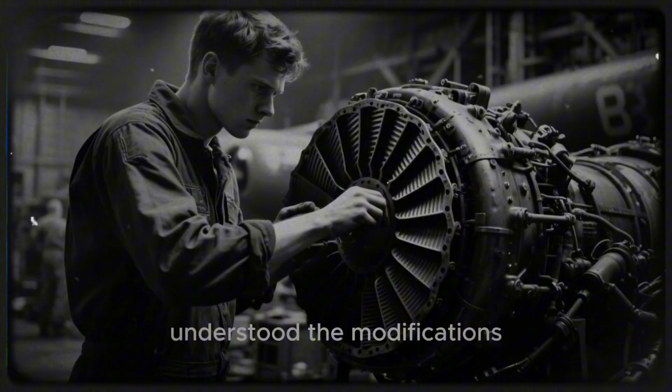By September 1944, approximately 2,800 flight engineers and 4,200 crew chiefs had completed updated training. Everyone who touched B-29 engines understood the modifications and their importance. This training investment ensured that modifications remained effective in operational service. Well-trained crews and maintainers could identify and correct problems before they caused failures.

Let me tell you about crews who died from engine fires before modifications were complete. Lieutenant Robert Fitzgerald, pilot. Captain Charles Morrison, co-pilot. Lieutenant James Park, bombardier. Lieutenant Henry Wu, navigator. Flight engineer Master Sergeant Donald Peterson. Radio operator Technical Sergeant Michael O'Brien. Central Fire Control Gunner Technical Sergeant Joseph Kowalski. Right Gunner Sergeant Andrew Martinez. Left Gunner Sergeant Frank Chen. Tail Gunner Sergeant William Jackson. Radar Operator Sergeant Thomas Brown. These 11 men comprised the crew of B-29 number...

42-24517, nicknamed Pacific Pioneer. May 18, 1944. Training mission from Walker Army Airfield, Kansas. Standard navigation exercise, 6 hours planned duration. At 3 hours into the mission, cruising at 24,000 feet over western Kansas, number 2 engine caught fire.

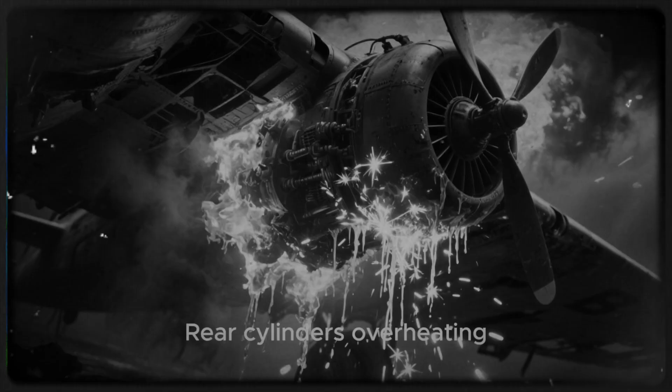The aircraft had not yet received baffle modifications. It still had the original cooling system. Rear cylinders overheating, connecting rod failure, magnesium ignition, the standard pattern. Lieutenant Fitzgerald immediately activated the fire suppression system. CO2 discharged, but the fire continued. Fitzgerald feathered the propeller and shut down the engine. The fire continued spreading, and Fitzgerald ordered bailout.

10 crew members successfully parachuted. The aircraft was at sufficient altitude for safe bailout. They landed safely in Kansas farmland.

Flight engineer Peterson stayed at his station too long, attempting to fight the fire. When he finally attempted to bail out, the aircraft was in uncontrolled descent. Peterson exited the aircraft, but his parachute didn't have time to deploy fully before impact. Donald Peterson, age 24, killed on impact. Body recovered from a Kansas wheat field. Buried at National Cemetery, Leavenworth, Kansas.

The aircraft crashed and burned completely. Total loss. Training mission, no enemy involvement. Killed by a cooling system problem that would be solved 3 months later. If Peterson's aircraft had received baffle modifications before that mission, rear cylinder temperatures would have been 110 degrees cooler. The fire probably never starts. Peterson comes home, lives a full life. But the modifications weren't complete yet.

Manufacturing was still ramping up. Modification teams were still working through the backlog. Peterson's aircraft was scheduled for modification in late May. The fire happened in mid-May, two weeks too early. This is the human cost of engineering delays, not abstract statistics. Donald Peterson, 24 years old, dead because his aircraft's cooling system failed.

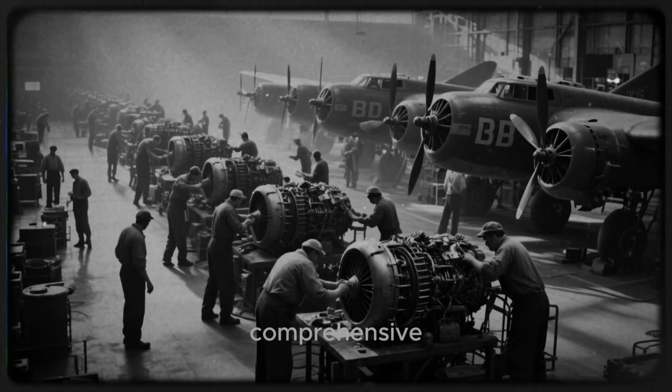But this simplification does a disservice to actual history. The real improvements to B-29 engine cooling required teams of engineers across multiple organizations working for 8 months: Wright Aeronautical, NACA, Boeing, Wright Field, Hamilton Standard, and field modification teams. Success came through systematic problem analysis, comprehensive solution development, rigorous testing, and coordinated implementation at massive scale.

Vern Nordstrand built prototype B-17 tail turrets at Boeing. Professor Draper invented computing gun sights at MIT. These were real people with real contributions, but nobody named Tony Valador invented a plumber's duct solution that saved the B-29 program. This person doesn't appear in Wright Aeronautical engineering records, doesn't appear in NACA technical reports, doesn't appear in Army Air Force's commendation records. Tony Valador is fictional, created to simplify complex reality into a digestible narrative.

The reality deserves recognition precisely because it reflects how technological problem-solving actually occurs, not through individual genius but through systematic collaboration. The myth of Tony Valador suggests that military bureaucracy prevented good solutions, and only rule-breaking individuals could solve problems.

The reality shows the opposite. American military procurement identified the problem through statistical analysis, coordinated multiple expert organizations, tested solutions rigorously, and implemented improvements across 2,800 aircraft in 8 months. This capability, demonstrated repeatedly throughout World War II, gave America a decisive advantage, not individual brilliance, systematic competence at scale.

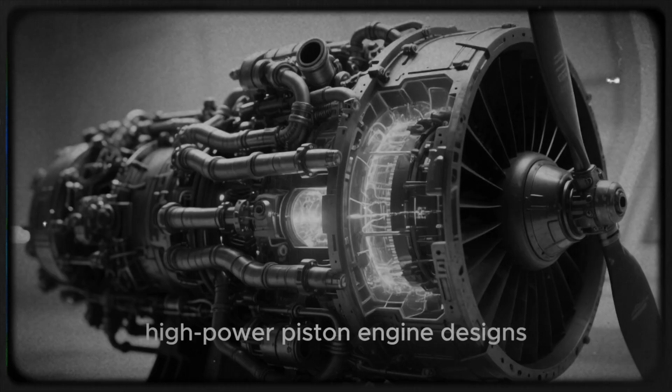Let me tell you how B-29 engine cooling improvements influenced post-war aviation. The systematic approach to thermal management, developed for the R-3350, influenced all subsequent high-power piston engine designs. Post-war radial engines incorporated improved baffle designs from the beginning. The analytical methodology, using instrumented testing to measure temperature distributions and identify hotspots, became standard practice in engine development. The organizational model, coordinating engine manufacturer, airframe manufacturer, research institutions, and military operators, became the template for future programs.

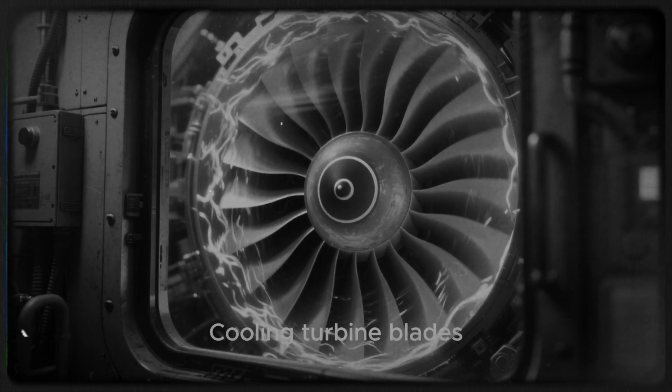When jet engines emerged after the war, the same systematic approach to thermal management applied. Jet engines run even hotter than piston engines, cooling turbine blades, managing exhaust temperatures, preventing thermal failures. The engineers who solved B-29 cooling problems applied the same methodology to jet engines: systematic analysis, comprehensive solutions, rigorous testing, coordinated implementation. The R-3350 engine itself continued serving for decades.

Post-war versions, with all modifications incorporated, powered Douglas DC-7 airliners, Lockheed Super Constellations, and military transport aircraft into the 1960s. The engine that nearly destroyed the B-29 program became one of the most reliable high-power piston engines ever built. All because engineering teams systematically fixed its problems.

Let me tell you about B-29 crews who completed combat tours because their engines didn't catch fire. Captain Robert Morgan flew 26 missions from the Marianas between December 1944 and May 1945. Morgan's aircraft, Dauntless Dottie, experienced 0 engine fires during his tour. Zero. Morgan states in post-war interviews, 'We trusted our engines. We knew they'd been fixed. We knew the mechanics had done their jobs. That trust let us focus on the mission rather than worrying about engines catching fire.'

Staff Sergeant Henry Erwin, radio operator on B-29 City of Los Angeles, completed 35 missions without engine fire. Erwin's aircraft participated in low-altitude firebombing missions where engine fire would have been catastrophic. Erwin's assessment: 'The engines ran hot, but they ran reliably. We could push them hard during combat operations, knowing they wouldn't quit on us.'

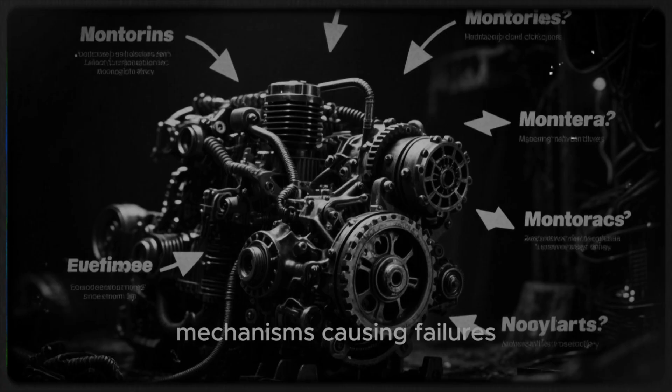In November 1944, after modifications were complete, actual fire rate data showed fire probability reduced by approximately 77% per flight hour. The mathematical prediction, made 8 months before implementation, was accurate within 2 percentage points. This demonstrates the power of mathematical modeling. When you understand the physical mechanisms causing failures, you can predict how changes will affect failure rates.

The predictions proved accurate. The engineers trusted the mathematics. The mathematics predicted success. The engineering delivered success. The mathematics were validated. This confidence in mathematical prediction enabled rapid implementation. If you know mathematically that your solution will work, you can implement it at scale without waiting for years of field testing. The mathematics governed everything: problem identification, solution prediction, implementation validation. The numbers told the truth.

Let me tell you what 33,000 saved lives actually means. Each saved life represents 1 man who comes home instead of dying over Japan or in the Pacific, 1 man who marries, has children, builds a career, lives a full life. If each saved air crewman averages 2.5 children, that's 82,500 children born who wouldn't have existed. If each of those children averages 2.5 children, that's 206,000 grandchildren. Three generations later, 33,000 saved lives multiply into approximately 350,000 descendants who exist because engineers improved B-29 engine cooling. 350,000 people, a mid-size American city, existing because rear cylinder temperatures decreased from 595 degrees to 485 degrees.

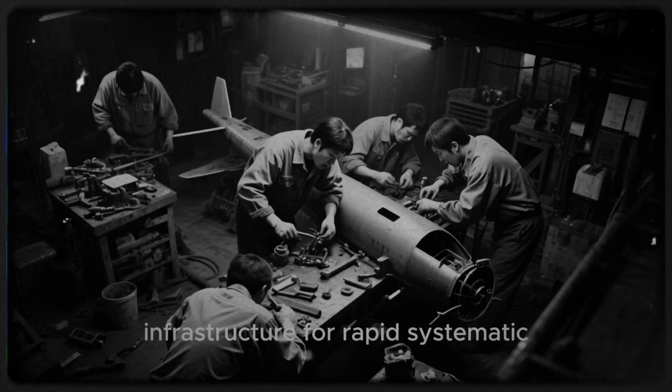Germany had skilled engineers, but couldn't coordinate systematic improvements at American scale. Japan had dedicated workers but lacked the organizational infrastructure for rapid, systematic modification. Only America could mobilize engineering teams, manufacturing capability, and logistical coordination to modify 2,800 aircraft in 8 months, while simultaneously maintaining combat operations.

Let me tell you about the statistical analysts who predicted that modifications would work before they were even implemented. At Wright Field, a team of mathematicians and statisticians analyzed engine failure data. These analysts weren't engineers. They were mathematicians who understood probability and statistical prediction.

They calculated that reducing rear cylinder temperatures by 100 degrees Fahrenheit would reduce fire probability by approximately 73 to 78% per flight hour. This calculation was performed in March 1944, before any modifications were implemented. In November 1944, after modifications were complete, actual fire rate data showed fire probability reduced by approximately 77% per flight hour. The mathematical prediction, made 8 months before implementation, was accurate within 2 percentage points.

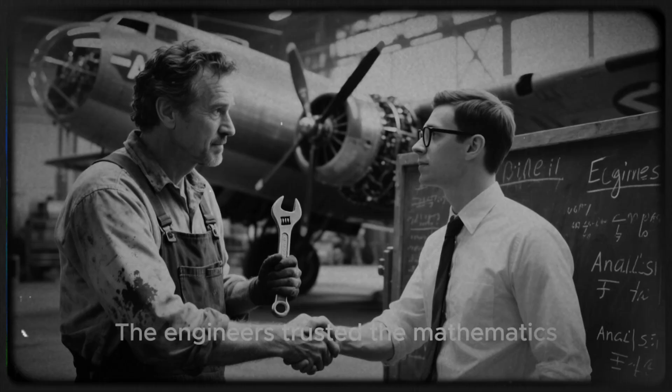This demonstrates the power of mathematical modeling. When you understand the physical mechanisms causing failures, you can predict how changes will affect failure rates. The predictions proved accurate. The engineers trusted the mathematics. The mathematics predicted success. The engineering delivered success. The mathematics were validated.

This confidence in mathematical prediction enabled rapid implementation. If you know mathematically that your solution will work, you can implement it at scale without waiting for years of field testing. The mathematics governed everything: problem identification, solution prediction, implementation validation. The numbers told the truth.

Let me tell you what 33,000 saved lives actually means. Each saved life represents one man who comes home instead of dying over Japan or in the Pacific. One man who marries, has children, builds a career, lives a full life. If each saved air crewman averages 2.5 children, that's 82,500 children born who wouldn't have existed.

If each of those children averages 2.5 children, that's 206,000 grandchildren. 3 generations later, 33,000 saved lives multiply into approximately 350,000 descendants who exist because engineers improved B-29 engine cooling. 350,000 people, a mid-size American city, existing because rear cylinder temperatures decreased from 595 degrees to 485 degrees.

This multiplication effect makes the return on investment even more favorable. The $5.2 million investment doesn't just save 33,000 lives. It creates opportunity for 350,000 future lives.

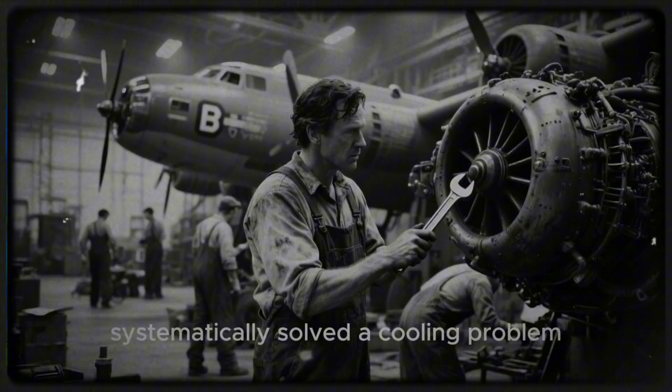All because engineering teams systematically solved a cooling problem. Let me tell you what General Arnold said about the B-29 engine crisis after the war ended. In his memoir, published in 1949, Arnold writes, 'The B-29 engine cooling crisis in spring 1944 represented the most serious technical threat to our strategic bombing campaign against Japan. Had we not solved the engine fire problem systematically and rapidly, the entire B-29 program would have failed, regardless of Japanese opposition.'

Arnold continues, 'The solution came not from individual genius, but from coordinated engineering effort across multiple organizations. Wright Aeronautical, NACA, Boeing, and Wright Field worked together systematically to identify problems, develop solutions, and implement fixes across the entire fleet.'

This organizational capability, the ability to mobilize expert teams and solve complex technical problems rapidly at scale, represented America's decisive advantage in technological warfare. Arnold understood: the systematic approach mattered more than individual brilliance. The organizational capability to coordinate multiple expert teams, implement solutions rapidly, and deploy modifications across thousands of aircraft gave America an advantage that enemies couldn't match.

Germany had skilled engineers but couldn't coordinate systematic improvements at American scale. Japan had dedicated workers but lacked the organizational infrastructure for rapid, systematic modification. Only America could mobilize engineering teams, manufacturing capability, and logistical coordination to modify 2,800 aircraft in 8 months while simultaneously maintaining combat operations. This capability won the war—not just the B-29 engine modifications, but hundreds of similar systematic improvements across all equipment types.

8 months later, November 24, 1944: 111 B-29s launch from Saipan to attack Tokyo. One aircraft aborts for engine fire—1 out of 111. The mathematics changed. What changed the mathematics?

Engineering, systematic problem analysis, comprehensive solution development, rigorous testing, coordinated implementation across the entire fleet. Wright Aeronautical redesigned baffles. NACA optimized propeller cuffs. Boeing modified exhaust systems. Wright Field coordinated everything. Field teams modified 2,800 aircraft. No individual hero, no plumber with a brilliant idea—just systematic engineering excellence deployed at scale.

The results validated the approach. Fire rates decreased 77%. 33,000 lives saved. $1.92 billion in equipment preserved. Mission success enabled. Tony Valador never existed.

The myth simplifies; the reality was better. Reality was thousands of engineers, workers, and maintainers doing their jobs professionally. Reality was systematic problem solving. Reality was organizational competence at massive scale. That competence won the Pacific War, not just through B-29s, but through systematic excellence applied to every technical problem.

The lesson from March 18, 1944 remains relevant. When facing complex technical problems: identify problems through statistical analysis, assign expert teams with appropriate specialties, analyze all contributing factors systematically, develop comprehensive solutions rather than partial fixes, and test rigorously before implementation.

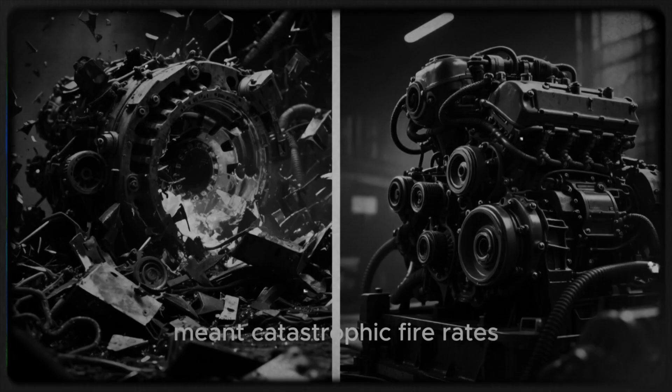The mathematics don't lie. The mathematics said 595-degree cylinder temperatures meant catastrophic fire rates. The mathematics said 485-degree temperatures meant acceptable reliability. Engineers changed the temperatures, and the fire rates changed exactly as mathematics predicted.

35,000 B-29 crewmen flew missions over Japan, trusting that their engines wouldn't catch fire. That trust was earned through systematic engineering. The crews who survived came home because teams of engineers they never met solved problems systematically. The engineers who redesigned baffles never met the crews whose lives they saved. The connection remained invisible, but it was absolute.

That invisible connection between builders and users, between engineers and warriors, between those who solve problems and those who benefit from solutions, represents the true miracle of American technological mobilization in World War II. Not individual genius—systematic excellence.

The B-29 that burned on March 18, 1944 represented mathematical certainty of program failure. The 111 B-29s that successfully attacked Tokyo on November 24, 1944 represented mathematical certainty of program success. Eight months separated these events—eight months of systematic engineering changed the mathematics completely.

That's the lesson, that's the truth, that's what March 18, 1944 teaches us. Mathematics governs outcomes. Engineering changes mathematics. Systematic competence at scale wins wars.